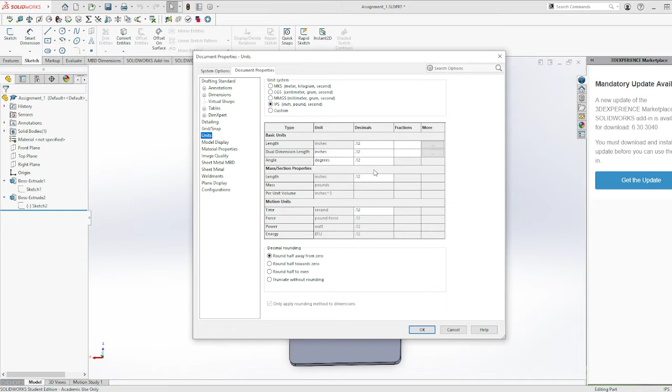Before you start working with any file from TaunTaun, make sure that TaunTaun does everything in metric, but we want to do everything imperial because FRC is an American competition, so everything will end up being imperial anyways. Go to Options, under Document Properties, go under Units and make sure you have IPS selected instead of MMGS. Make sure everything is imperial, click OK. It should take a few seconds depending on how fast your computer is, and now every single measurement in this thing is going to be imperial instead of metric.

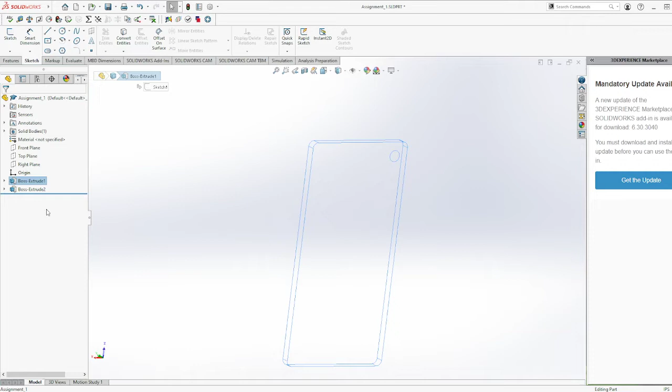Next, we want to duplicate this. The best way to do it is to look at this side, where we see two boss extrudes, and it shows you which extrude he did. The first thing he did was he made the rectangle and made the circle on top of that. So that's what he did.

Starting with the first one, going to Sketch 1, this is exactly what he did, which is a rectangle, and he extruded it, then made a circle on top of the rectangle and extruded the circle. So starting with this one, we want to go into Edit Sketch because we want to see the dimensions. It's 10 by 20 inches, and the corner radius is 0.5 inch. So that's what we're going to do exactly.

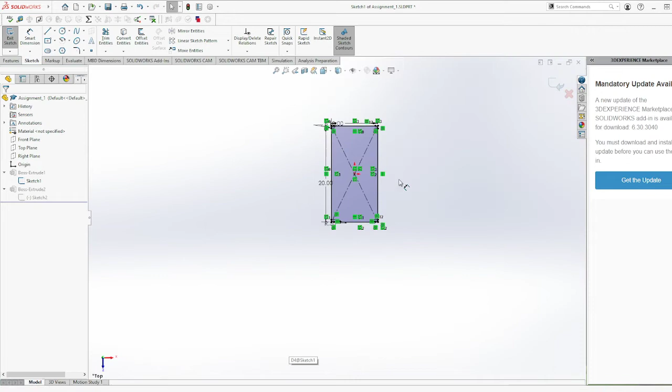Let's start with opening a new file. Make sure it's not Assembly, not Drawing, but Parts. Make sure it's Parts, click OK.

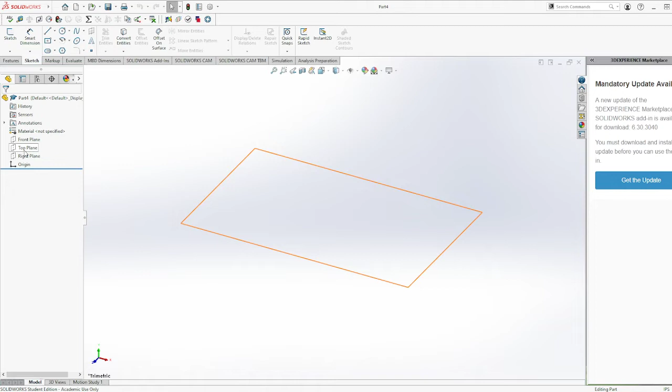Now we want to do exactly the same thing. It doesn't matter which plane you do it on because we're not taking this to assembly, but if you do take it to assembly, think about which orientation you are going to be assembling your stuff in - that's going to help. For now, I'm just going to select Top, click there, go into Sketch. This allows you to go into sketch mode with the plane selected, so that's sort of a shortcut.

For the first one, make sure you have a center rectangle, not any of the other ones - make sure it's the second one. Roughly draw a rectangle starting with the center. It doesn't matter the dimension, we're going to adjust dimensions now.

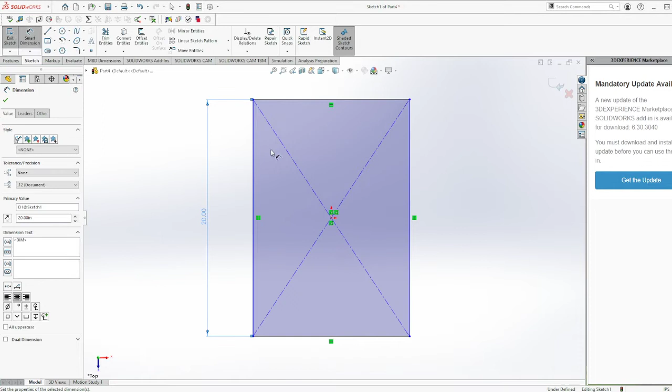Taking a look at TaunTaun's file, it's 20 by 10, so that's the dimension we're going to adjust it to. Starting with Smart Dimensions, this one's 20, and the next one is 10, so this one's 10 inches.

So now we have a rectangle, and now we're going to do the fillets. For this one, it's easier to do it TaunTaun's way, so I'm just going to do the fillets TaunTaun's way, but normally I do the fillets at the end. Either way works.

Select the fillet, select the two sides you want to be filleting on, and that should give you a fillet. Instead of 0.1, we're going to take a look at what he has here, which is radius 0.5 inch. So instead of 0.1, we're doing 0.5.

For the purpose of this, you can just do the fillets with the rest of them exactly the same, and it should remember 0.5 automatically. So you can just select the two ends and click OK, and everything should be done. Once you have done all four corners, it's exactly the same thing as TaunTaun has.

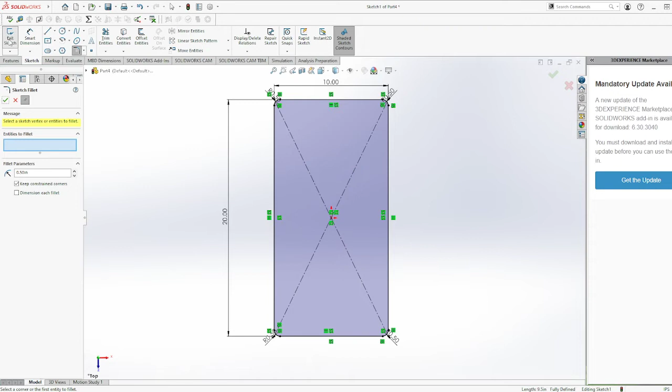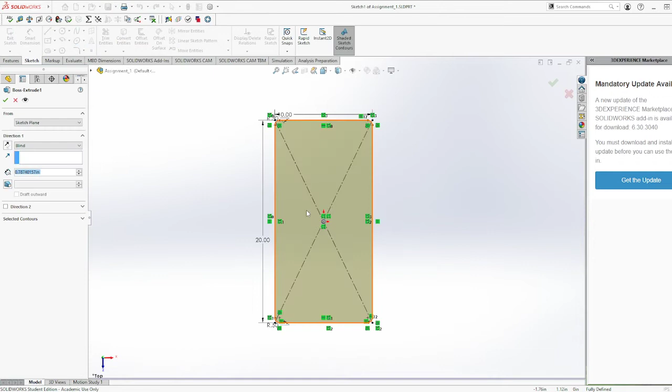Exit Sketch, go into Features, Extruded Boss/Base, and we want to see what height TaunTaun is extruding by. To do that, exit Boss Extrude first because we cannot do both at the same time. Come back to TaunTaun's file, exit sketch, and go into Boss Extrude 1, right click, and Edit Feature. This allows us to see that he extruded by this height, and we're just going to copy the height because it's not a nice number on our end.

Okay, good. Yep, the other thing is make sure not to randomly select stuff while you're doing things. So here's this one.

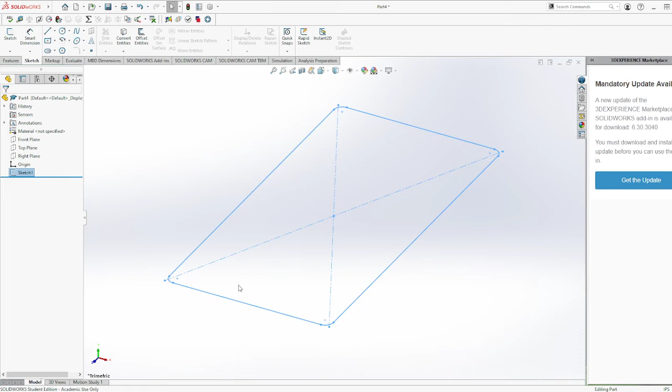So now we want to extrude it. Go into features, boss extrude, come here, click enter. This gives you a preview. It looks like TaunTaun's iPhone, so that's good.

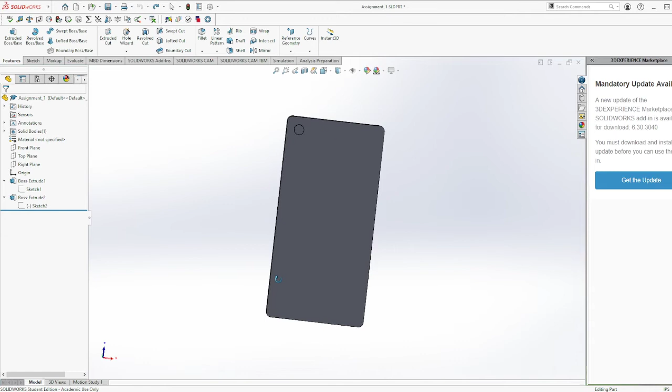Click OK. Now next, what we want to try is the so-called camera of the iPhone. Let me put it in a better orientation. As we can see, it's on the back, not the front.

So for this one, instead of selecting the front for sketch—when you click sketch, it tells you what surface you select on—instead of the surface in the front, we want a surface in the back. So click the back surface. You can identify the back surface because it's darker than the front one. So now we have the back surface.

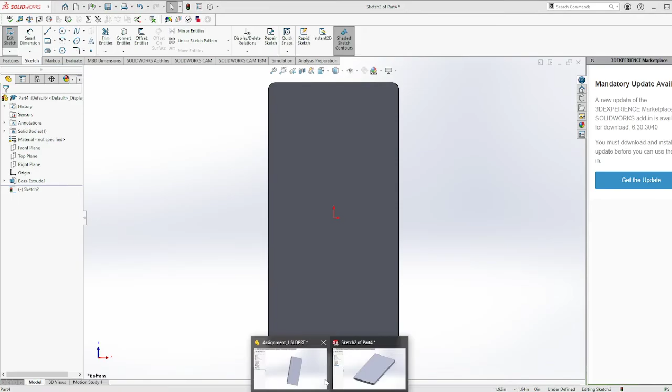Now we need to go into TaunTaun's thing and go into the second sketch, right click edit sketch to see what he has.

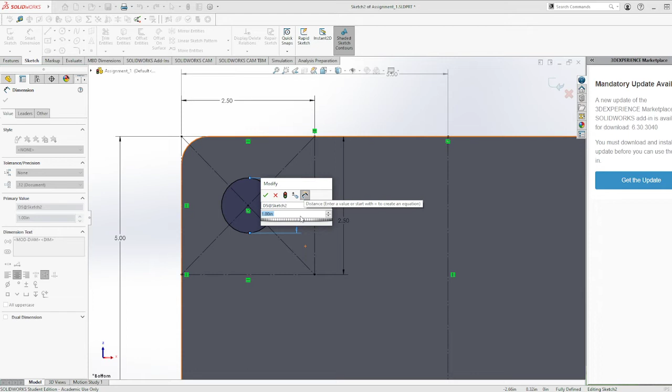The larger square you can ignore because he didn't do anything with them. We want to see he took a square from the corner, 2.5 inch by 2.5 inch, and use smart dimension to see the radius of this thing, which is 1 inch in diameter, so 0.5 inch in radius. That's what we're going to do as well.

So come here, we're already in sketch mode. Select a corner rectangle in this case. Can I find the corner of that thing? No. That's one of the reasons why I don't like the corner rectangle that way, but we can do it on the other corners and get it around this way, which is good.

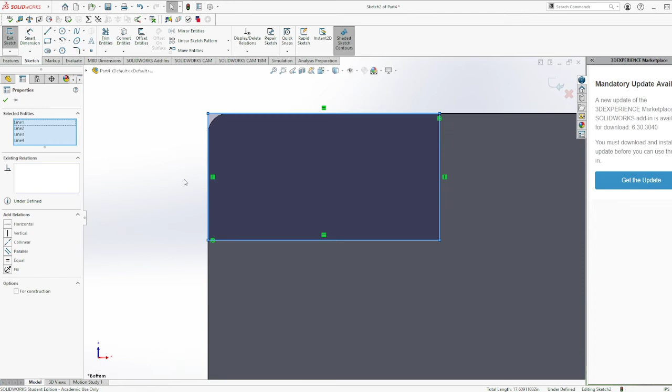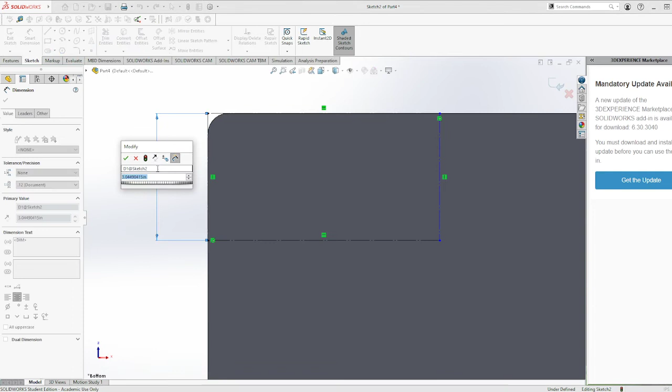So now we want to make sure we smart-dimension all of them into 2.5 inches. 2.5 inch. And this one is going to be 2.5 inch.

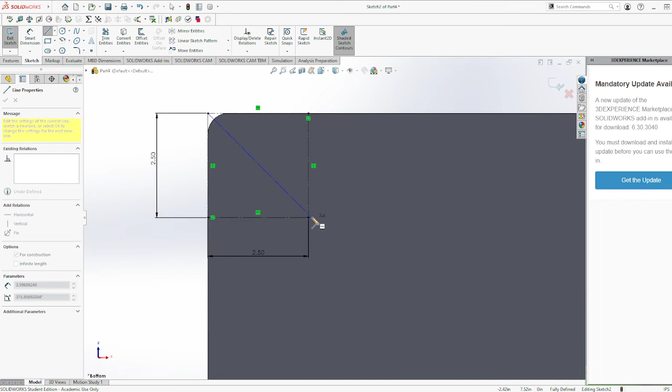What he did next, let's see, is draw these two center lines. That's what we're going to do as well, to find the center of the square. Make sure you have center line instead of line selected. Just draw them diagonally. If you see the orange light up for the dot, that means you're actually on the dot—that's sort of a trick. And now the center is shown.

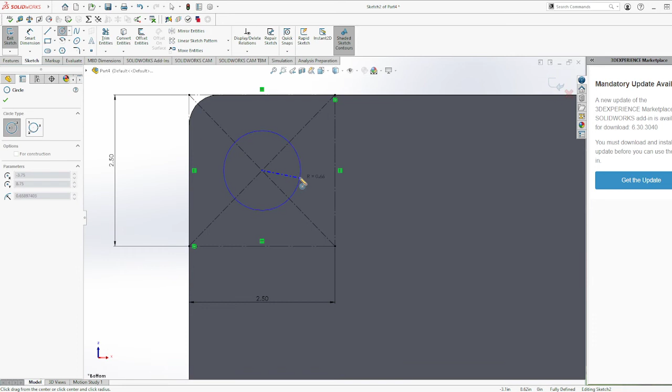So now take a circle, make sure you have the circle, not the perimeter circle. Take a circle here, and let's make sure mine is on the dot. Let me delete this one, and again, see the dot light up in orange—that means it's selected. Take any circle and select smart dimension, make sure the circle's diameter is 1 inch.

So now I have to duplicate this part of TomTom's design. Now let's move on to see what height he picked for the circle.

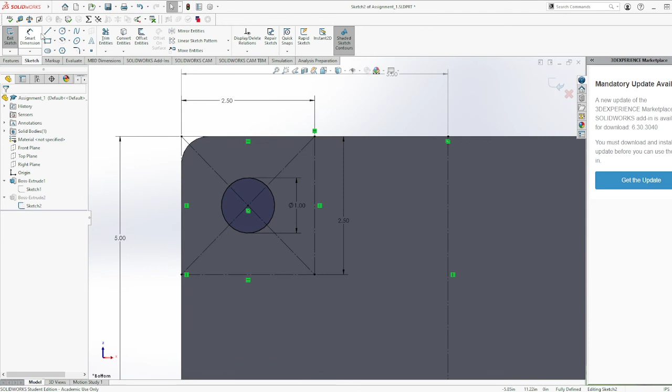In my case select good, so everything's good, and moving on to TomTom's side, exit sketch. What I want to do next is select boss extrude, select edit feature, and see what his height is.

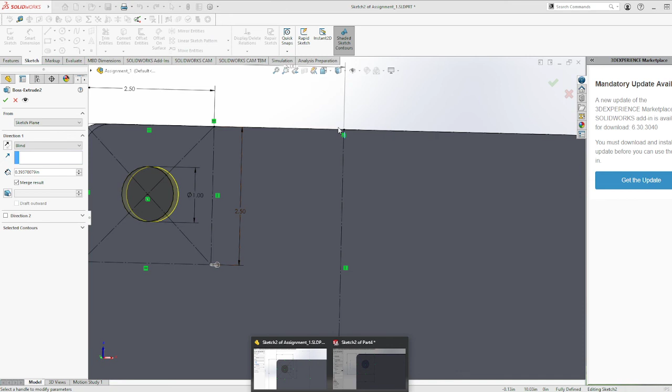So going to take this number because it's a weird number again, and come on to this side, which is my version. Wait, is it? No, okay, so that's still TomTom's version—my bad. You have to exit boss extrude before it lets you do anything.

So let me come to my side, which is this one. Going to exit sketch, which is good. Select feature, select extrude base, take this number and select enter. Get a preview—that looks like exactly what he has. Click OK, and we're done.

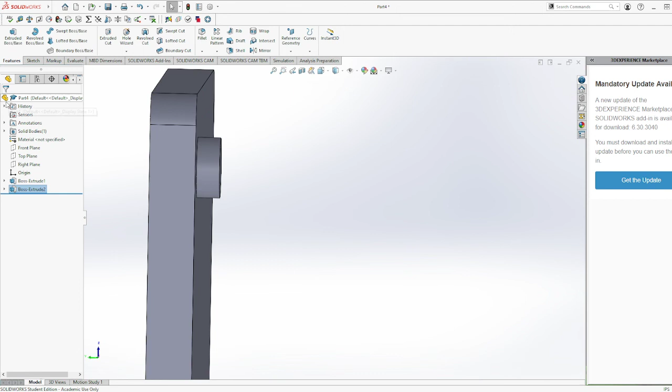That's how to make an exact copy of TomTom's iPhone at very low resolutions, aka assignment 1 of TomTom's assignments. As for exactly how to save stuff, Control S or save.